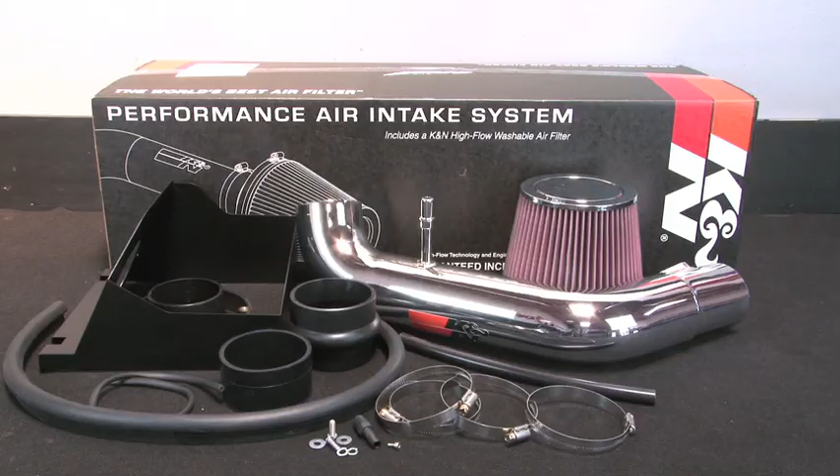This K&N air intake system is designed to increase power and acceleration by reducing restriction in the intake path. K&N 77-2581 KP air intake fits 2011 Ford F150 pickup trucks with a 5.0-liter engine. Its design utilizes a mandrel bent aluminum tube with a chrome-like finish for great looks and smooth airflow.

The 77-2581 KP air intake is not legal for highway use in California or other states adopting California emission standards. Check knfilters.com for an up-to-date list of models this air intake fits and for a list of other CARB adoption states.

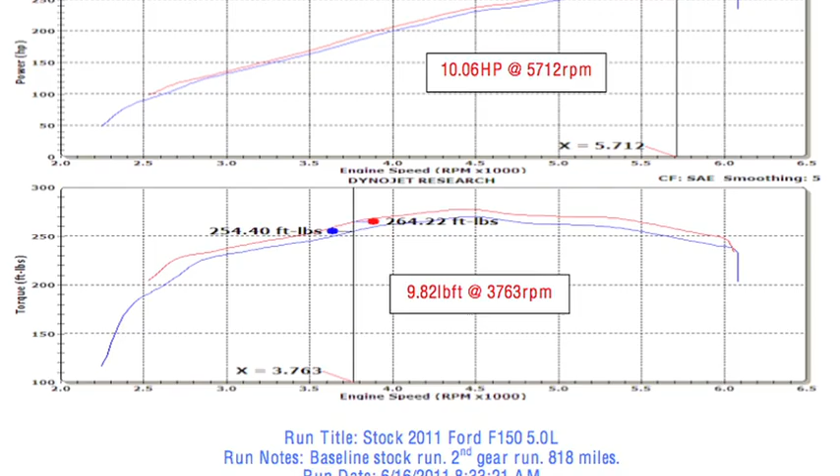K&N power testing showed an estimated power gain of 10 horsepower at 5,712 RPM with the 77-2581 KP air intake installed on a 2011 Ford F150 with a 5.0-liter engine. Actual results will vary depending on the condition of the vehicle, mileage, weather, and other variables.

With the air intake installed, we ran the vehicle on the dyno to test the sound comparison versus the stock intake.

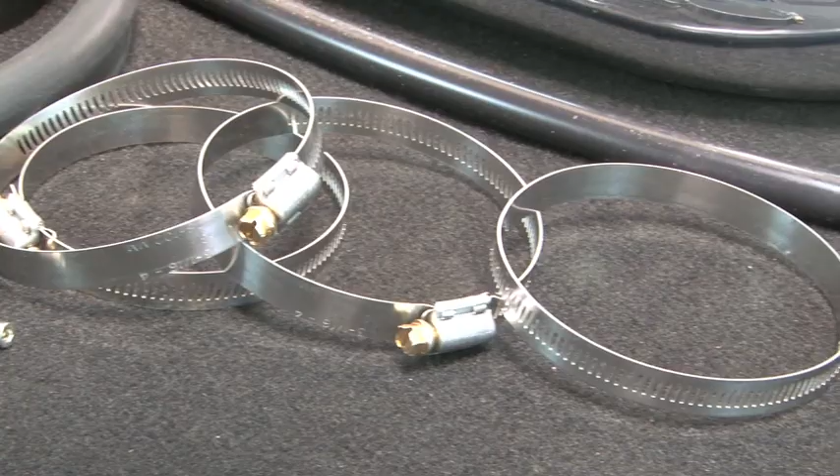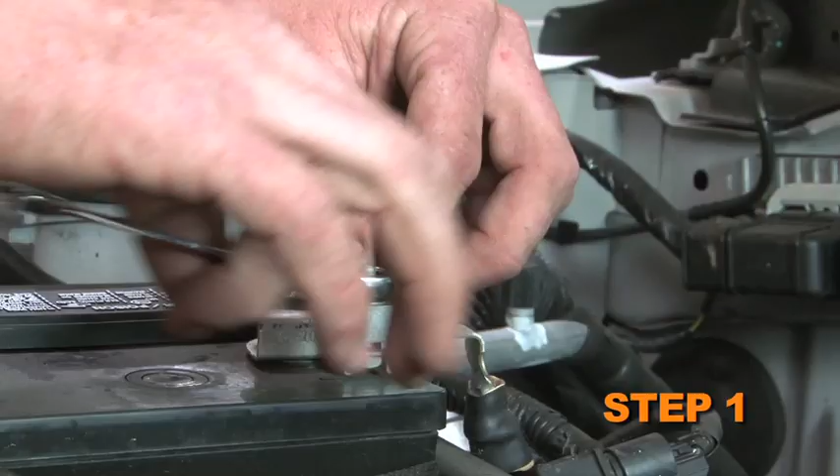The intake system includes components that have been designed or matched to the needs of these vehicles to produce a safe horsepower increase. Detailed installation instructions are included with this kit. The tools needed for this install are shown. Turn off the ignition and disconnect the negative battery cable. Release the red locking tab and then disconnect the mass air sensor electrical connection.

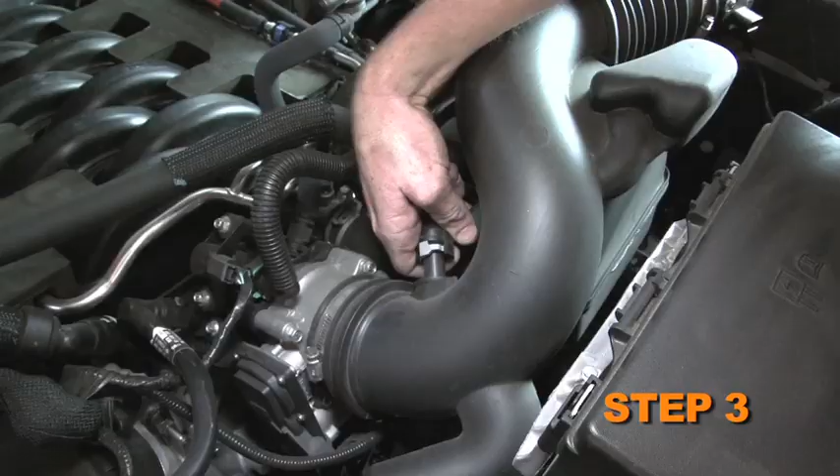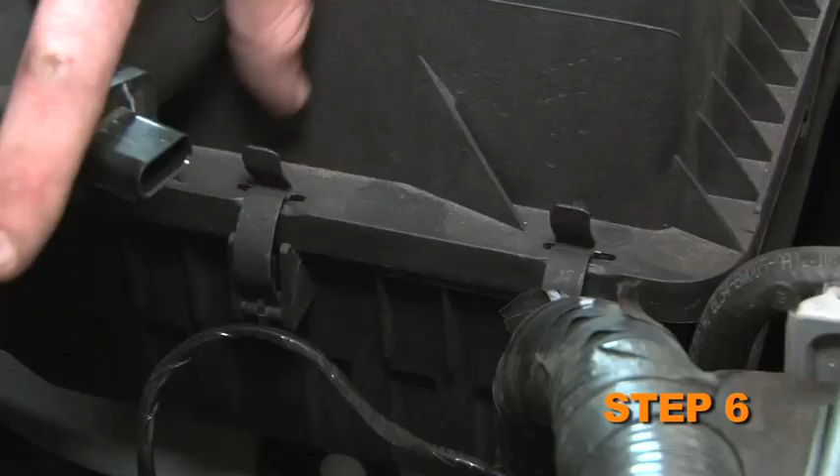Rotate the locking tab, then unhook the crankcase vent hose from the factory intake tube. Disconnect the evap hose from the check valve. Loosen the hose clamp securing the factory intake tube to the throttle body. Release the 3 clips securing the upper airbox housing to the lower housing. Then remove the intake tube, upper airbox and air filter from the vehicle.

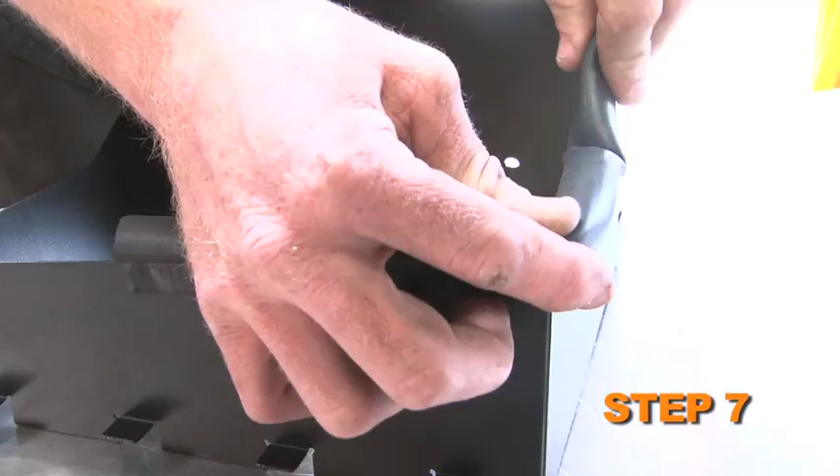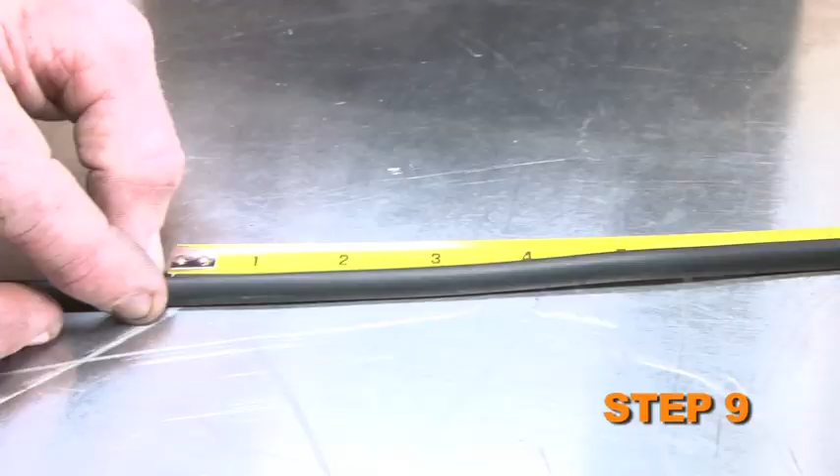Install the provided edge trim onto the heat shield. Some trimming of the edge trim will be necessary. Install the filter adapter into the heat shield and secure it with the provided hardware. Cut the provided edge trim into 2 9-inch sections. Install the 2 9-inch sections of edge trim onto the bottom of the heat shield.

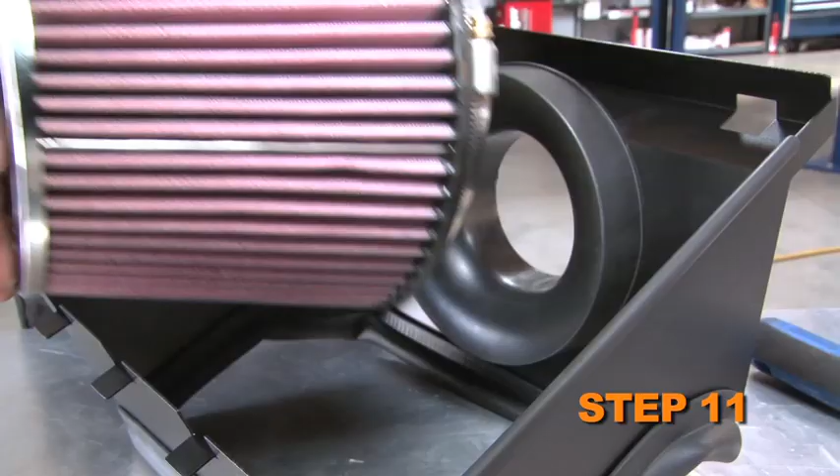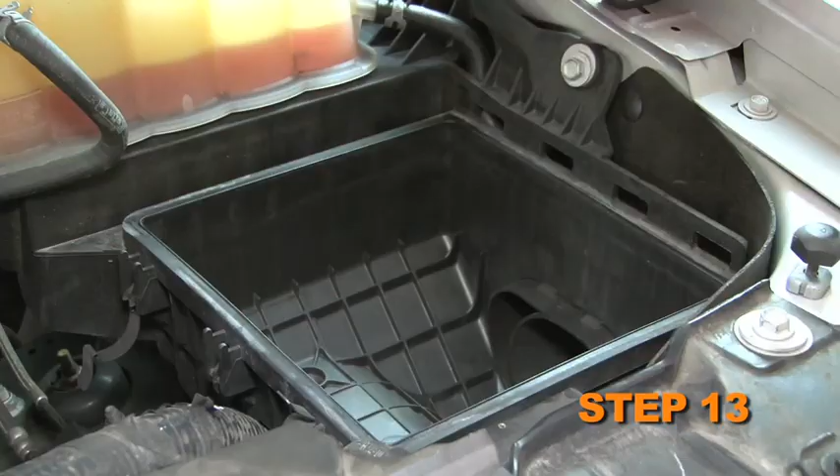Install the K&N air filter onto the filter adapter and secure it with the provided hose clamp. Remove the center airbox retaining clip. Install the heat shield filter assembly onto the lower airbox and secure it with the factory airbox retaining clips. Install the provided silicone hose onto the throttle body and secure it with the provided hose clamp. Install the provided silicone hump hose onto the filter adapter and secure it with the provided hose clamp.

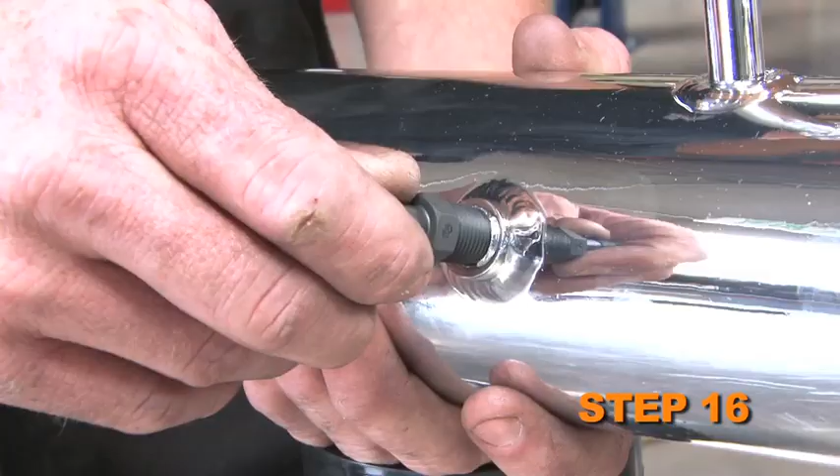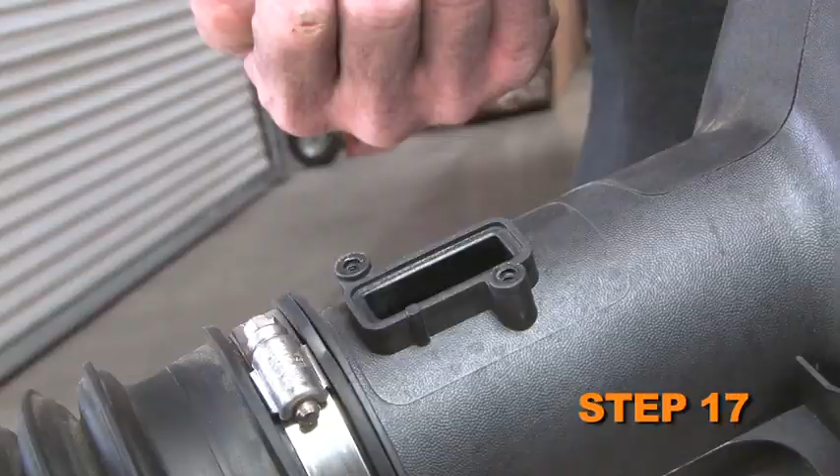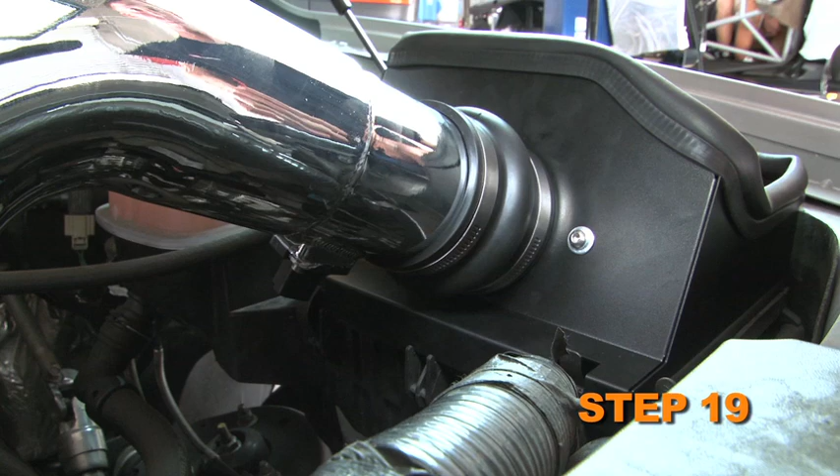Install the provided 3/8-inch hose fitting into the K&N intake tube. Remove the 2 screws securing the mass air sensor, then remove it from the stock intake tube. Install the mass air sensor into the K&N intake tube and secure it with the provided hardware. Install the K&N intake tube assembly into the silicone hose attached to the filter adapter, then into the silicone hose on the throttle body. Secure it with the provided hose clamps.

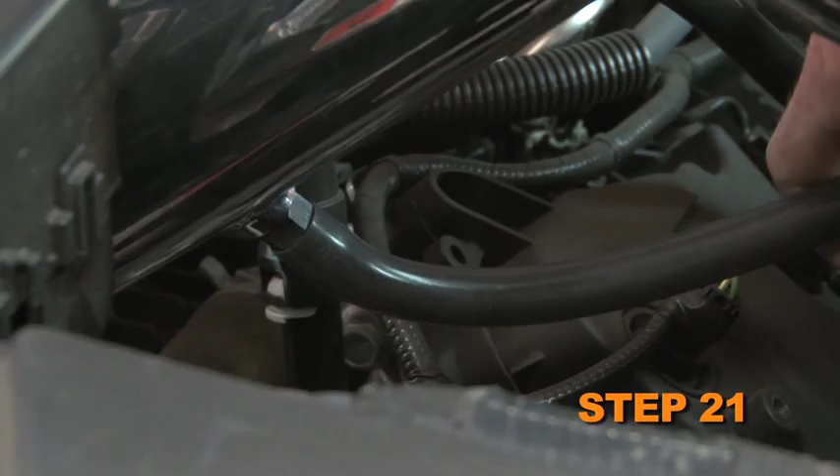Connect the crankcase vent hose to the quick disconnect fitting on the K&N intake tube. Install the provided silicone hose onto the 3/8-inch fitting installed in the K&N intake tube. Then attach the open end to the evap check valve. Reconnect the mass air sensor electrical connection. Reconnect the vehicle's negative battery cable. Double check to make sure everything is tight and properly positioned before starting the vehicle.

It will be necessary for all K&N high-flow air intake systems to be checked periodically for realignment, clearance, and tightening of all connections. Failure to follow the above instructions or proper maintenance may void warranty.